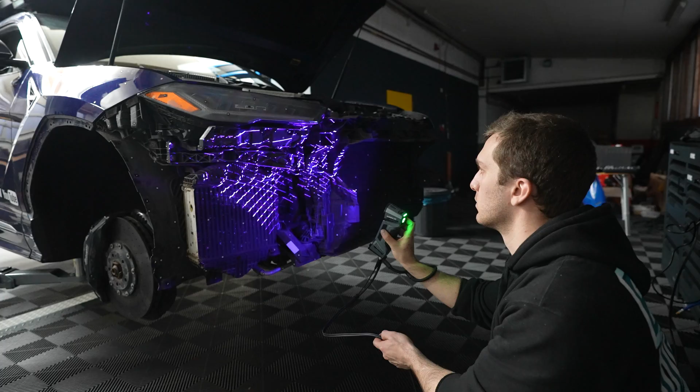He came off and we did some scanning with our Shining 3D FreeScan Combo scanner. Is there anything extra we should mention when it comes to scanning the car?

It was quite an easy process. Yeah, it was really straightforward, we didn't have any issues. Just applying the dots was the biggest time hurdle, and then scanning was like 30 minutes.

There were lots of comments about how you can put masking tape down to apply the dots and then take them off. We might do that for future projects, but what I want to say is we had the opportunity to play with Shining 3D's latest generation scanner that doesn't even require scanning dots. Stay tuned for that video.

More importantly, after that Lapo went on with designing, and we had many phone calls with Connor to talk through various design options.

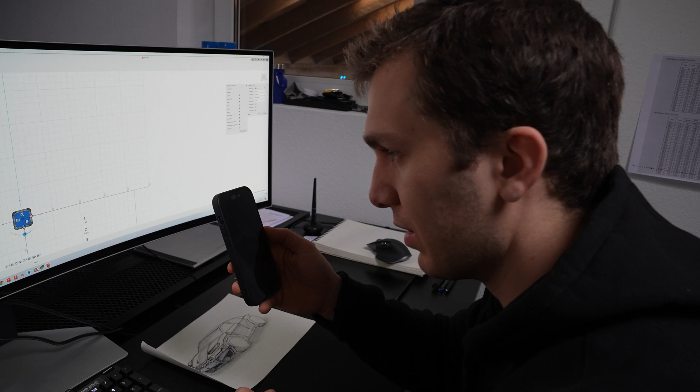You can see the process here. We're going to start with the front bumper first, so we see the cost of material and everything else. We're going to start with the main crash member that's going to tie everything together - this is the main structure. It's going to protect the radiators and the intercooler.

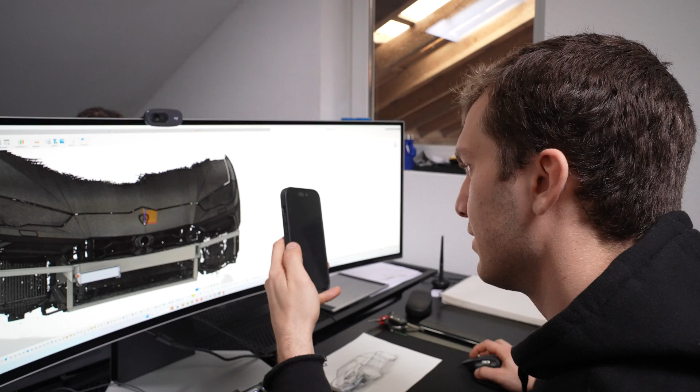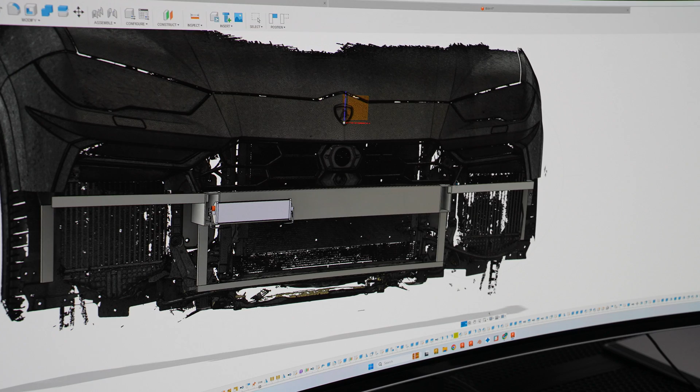I also have another option for you - we can move the intercoolers, but it's going to cost around 8,000 euros. My idea was to move the intercooler in front of the radiator, and there are two caveats to that: one, the 8,000 euros, and two, cooling. Because putting intercoolers in front of radiators is going to obstruct the airflow, and this car is already known to overheat, so I don't think it's a good idea.

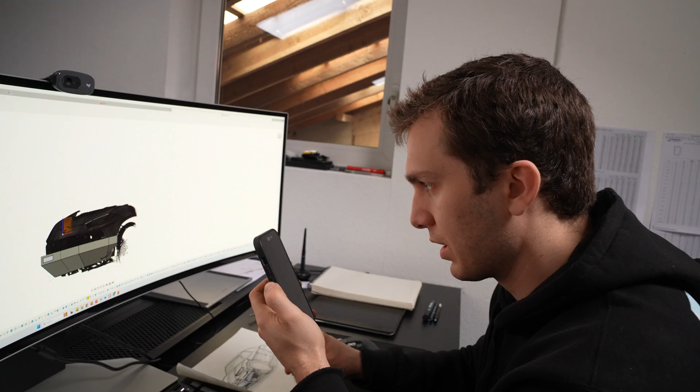But in the end it's going to look like this, more or less. It's going to have holes here so the air can go through, but I want to create a high pressure zone in front of the coolers so it's way more efficient than just a flat sheet. After we do the front bumper, the rear bumper won't take that much because it's simpler. What I'm going to do is finish the design, do a couple of renders - give me today so I can finish the front bumper definitely, and I can have a quote made for this, and then we go from there.

There were many calls like that, and eventually we decided to keep the bumper stock.

No, all jokes aside, we're going to show you the final version now on our design on the computer. This design has already been paid for, approved, and is actually now being laser cut by our metal company provider, because we don't have laser cutting technology in-house yet - we're just a garage startup.

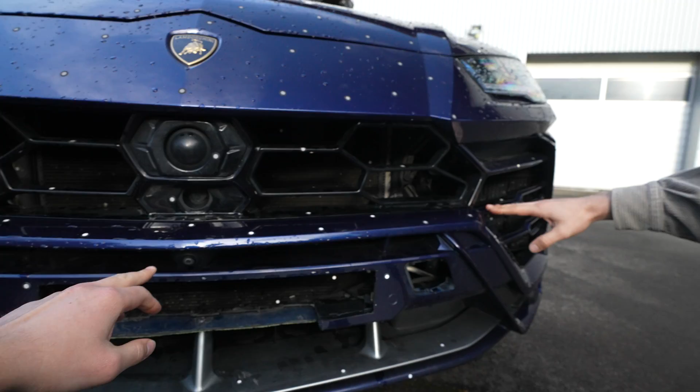No, let's have another close look at the car, because it'll be easier to understand what we're doing. So the top part of the bumper will remain stock, up until here. Basically, if you look from this point, this line, this plane, is, except for this ridge, going to remain stock - also because we have a crash sensor here which we don't want to mess with. So everything under here is going to go, and everything on top is going to stay.

Then another thing, we have here an infrared camera for night vision, and we opted to install 2 infrared lights to help with the view - so even an improvement of functionality of the car.

The coolers - we spoke about multiple options of possibly relocating them for design purposes, but eventually we decided against it. It makes no sense because it's there for a reason. We keep it there, but the options have been discussed.

Actually, to be honest, the options were to put it in the middle in front of the coolers. One, it was very expensive. Two, it could have created problems with cooling. And three, if we ever bumped into something, there's no fast replacement for it. So the idea is if he smashes onto something and stays with the OEM one, he can order it and have it replaced, instead of waiting maybe 6 months to have a new one fabricated. So that's the things we need to juggle with in these situations.

And another benefit - look at the stock bumper. It's completely open, so you can almost stick your fist through it, and a massive rock could damage the stock coolers. It's not really SUV-ish or off-road sensitive. So in our case, the bumper will probably be more protective. That's the whole idea - it's going to increase approach angle for off-roading, protect all the main elements that need protecting, and it's going to look cool.

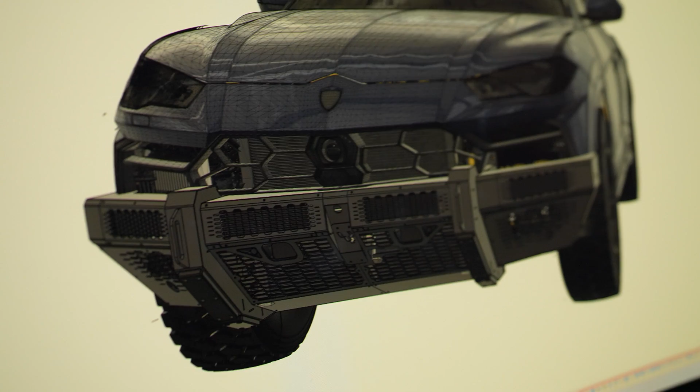As we said before, after a lot of back and forth with Connor, we ended up with this design, which I think is a really good final iteration. As you can see, I tried to continue all the body lines and give it a cohesive look. You can see over here this flows together, and even if you turn it around, everything is still flowing together quite nicely. Of course you have the limitations of sheet metal, which isn't very prone to being curvy, but very straight.

So this is what I was talking about before - these are the 4 lights, you can see them also on the other side. They're completely enclosed by panels meshed with the same design as the OEM, so hexagonal, quite oblong hexagons. These are going to protect the LEDs, the lenses, and are going to create a tough look, and structurally are going to help with stability.

Furthermore, these are the infrared lights that are going to help with vision at night. Here is the hole for the parking camera. Up here we have the famous infrared camera. Why is it famous? Because it's cool.

Okay, alright, then we relocated the parking sensors with some special brackets that are going to be resin printed in black. You can see them here - triangular shape, and down here it's rounded.

And on the sides it's nested in the steel structure. Furthermore, down you have a removable panel for the intercoolers. The same situation for the main cooler, core cooler, because it's multiple coolers in one, which is going to be for the radiator, the aircon, the oil coolers, so it's a lot of stuff. These are in 2-piece, so they're modular, so if one gets damaged you can replace it.

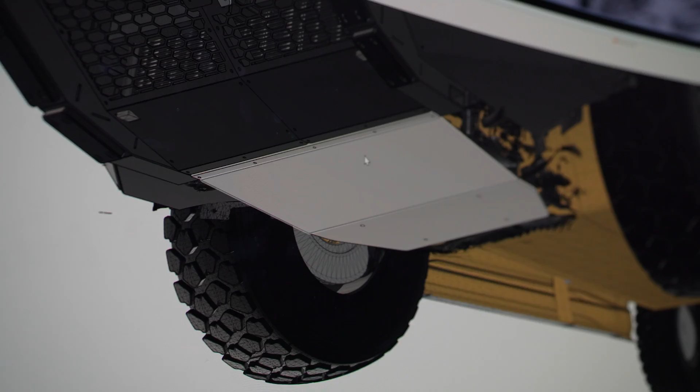There are 2 wear pads made out of black nylon, which are going to be replaceable, so it's not going to damage directly the sheet metal, but it's going to damage them. And furthermore, I'm going to take off the bumper because you can see it better from there.

Here you have the oil pan, which is something you don't want to mess with, because if you puncture the oil pan, you're going to be stranded. So we decided to protect it with a thick plate of aluminum, more precisely 6061, 6mm laser cut and bent.

You can see there's still going to be airflow around all the engine components, but it's going to be well protected. If you look at the side, you can see we dramatically increased the ground clearance and the approach angle of the vehicle by scooping up everything underneath. So he's going to be able to go right on the things that he wants to go on top.

Oopsies. Yeah, I think the design, I'm very happy with it. I think it's very cohesive with the styling of the car, and it's gonna provide all the features that he's gonna need for going around the world.

As mentioned, the design is now being already laser cut by our metal supplier. The car will go away, come back, and we're gonna fabricate the bumper here. Then, in the meantime, we'll be designing the back bumper.

This is, at the end of the day, tailored to customers' wishes. So, of course, you can say 'but I would have done differently.' There were multiple iterations. Customer is king. This is what he wanted, this is what we made.

So, at this point in time, there are still lots of questions on social media, to me privately. What is Vulcan Alpha actually? Are you just like 3D scanning, 3D printing? Yes, we can 3D scan your car for your own project. We can 3D print the various prototypes. We can 3D print done components. We can design complete body kits and cars either for individuals or for companies. Just simply engineering dream solutions.

And the beautiful part about this design, we have everything already in CAD, the file is ready. If you are in Dubai, if you are wherever, we can just send it over, sell it, of course, to you, and you can fabricate it locally. So you don't have to ship the car all the way to us, like in case of Connor when he shipped the car to Europe for it to be done.

We're completely open, so if there are any Urus owners out there that want to have something like this, or maybe with some changes, get in touch. And I think that's kind of it.